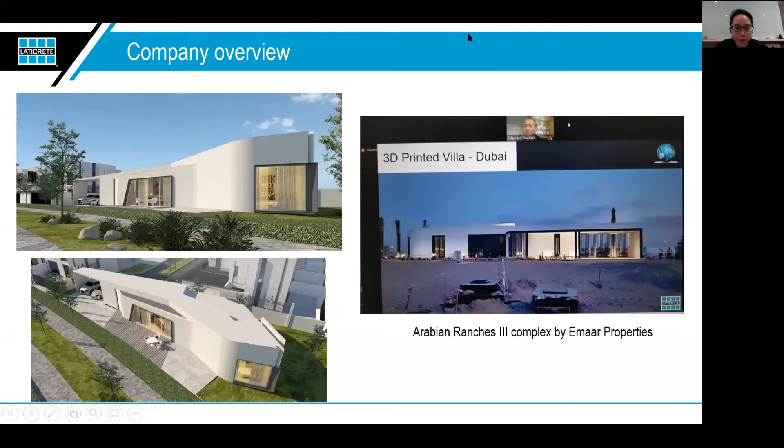So why does all of these projects look into Laticrete? It's because we provide what we call a system solution, and also the warranties that come together with the system solution. A lot of the time, what we notice is when you put it into a BQ, things are separated into packages. You have waterproofing, you have adhesive, basically everything is separated up.

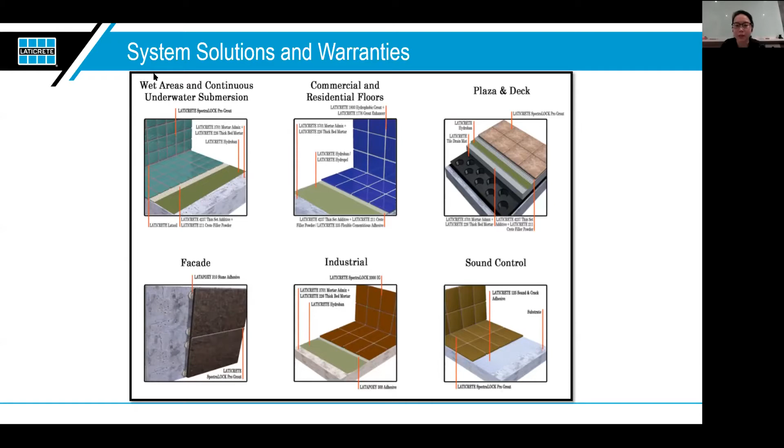So basically, system means anything from concrete up. Why? Because every time we look at things, we look at them separately—what can we get at the most cost efficient for waterproofing, then the most cost efficient for adhesive, and so on. But then after that, when you try to put them together, sometimes they may not be compatible. So for Laticrete, we like to look at it as a whole system rather than separate entities, and when you have the whole system, we will actually minimize these things from happening.

For example, you have efflorescence—these are all very common things that happen on site. When all these things happen, the next thing that occurs is who is going to bear for this. And then when you look into warranty claims, everybody will try to point fingers at everybody because they will say efflorescence is definitely not a tile issue.

So is it now a grouting issue? Is it going to be an adhesive issue? And if you have so many different brands in all the layers, then everyone will come together and say, because there are so many factors, when you want to do warranty claims, it becomes something very complicated. It may take a very long time also as they try to sort out who is going to be the one to solve this issue.

Whereas if you were to take a system approach, that means, as I say, if everything comes under one brand, then it's much easier to pinpoint who to look for when such a thing happens.

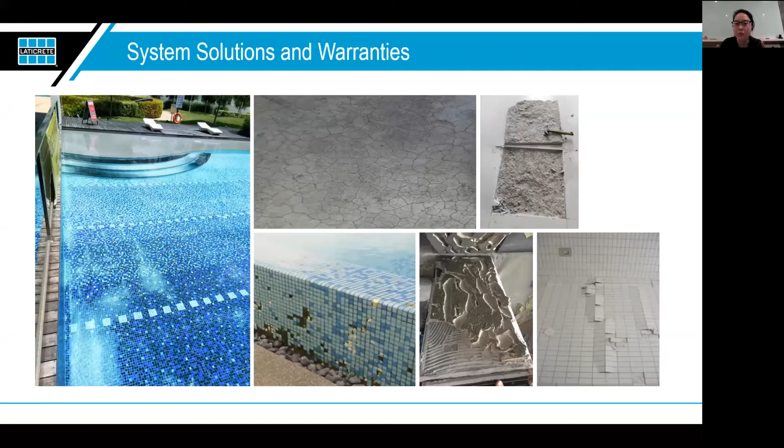So in Laticrete, other than following what the market provides—the market provides what we say is product warranty, they also provide joint warranty together with the applicators—for Laticrete, we provide one more warranty, which is what we call the system warranty, meaning anything from concrete up. If you use Laticrete, when anything like this happens, Laticrete will bear not just our product, we will also bear for the labor costs, we also will bear for the finishes costs. Of course there are some terms and conditions applying, but basically when you go for the system approach, if there's any failure, just look for us. So that's how we look at things.

So when we look at tiles and stone installation systems, why does tile fail? Why do the tiles pop up and so on? It could be a lot of reasons. It could be the tile itself—maybe they have a lot of powder underneath. It could be the adhesive failure. It could also be the screed failure. It could also be the waterproofing failure. Every single layer here, if they were to fail, it means the tile will just come off.

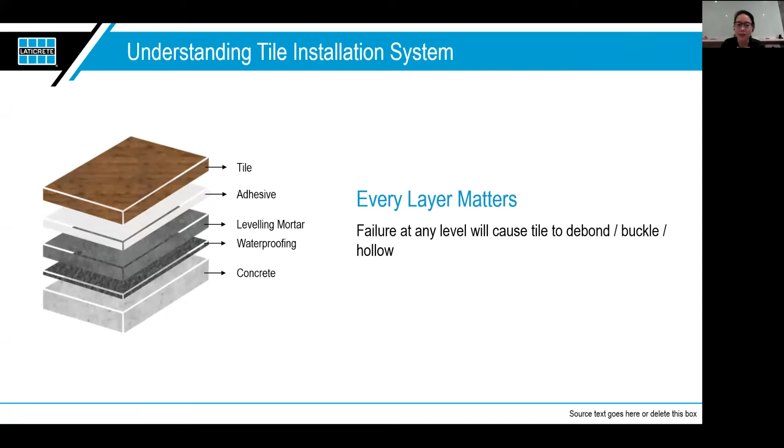So that's why we always look at it as a system, because every single layer matters. If one layer fails, not only that layer, right, everything fails. So they actually come together, they work together. Ideally, we look at it as a whole rather than individual products.

For example, sometimes when this happens, when tiles come off on site, normally what will happen is we will have technical people come on site, and they will have to see and try to determine where the failure is. Did it fail at the waterproofing layer? Did it fail at the screed layer? At which layer did it fail?

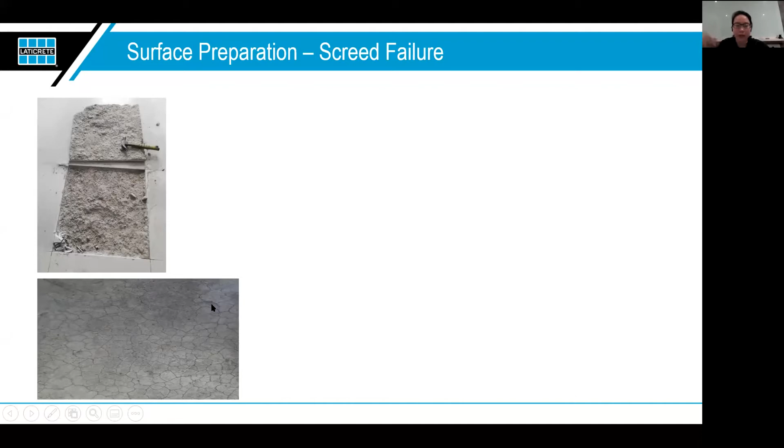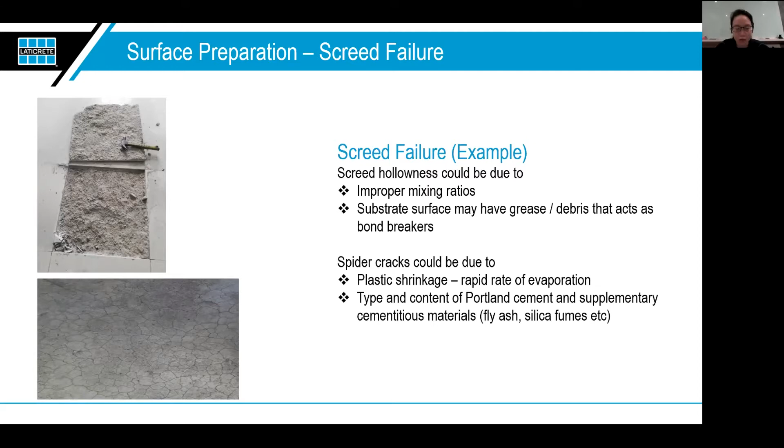In this case, it fails at the screed layer. You see the screed came off together with it. It's very common, especially in Malaysia, to see screeds happening like this, whereby you have spider cracks everywhere. A lot of time when this happens, most people will just say it's like that, screed is supposed to be like that, screed is supposed to have all these cracks, it's impossible to have crack-free screed. So because this is something we are so used to, we would think this is normal.

But you can actually reduce the cracks a lot by using the right ratio. Normally in your BQ and your specs, you do specify a very good ratio, but when it comes to site, what they practice is very much different from what is written on paper. Normally on site mix, we have less cement content because they will put one bag of cement or one part of cement to 7 parts of sand, sometimes even more than that. And it depends on how it's mixed on site.

Whereas in Singapore, they prefer a pre-pack, meaning it's already pre-packed with the ideal ratio. So all they need to do is just add water and mix it. There's no way for the ratio to run. Whereas here, it depends on the worker. Some worker's changkol is bigger, fuller, some as they hold it and hoist it up is much less. So your ratio always runs.

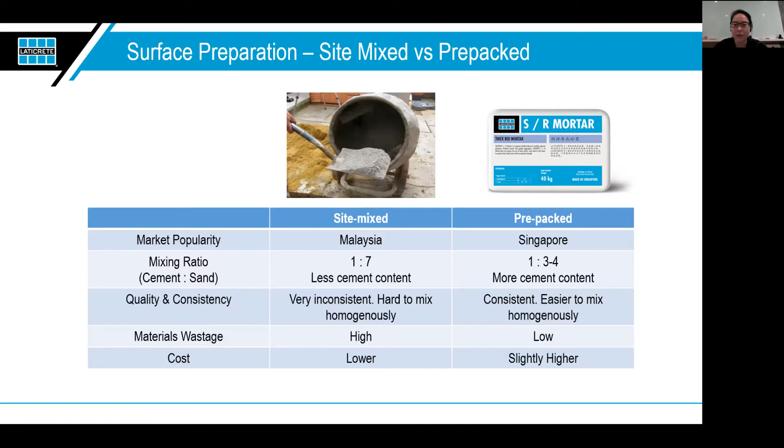So certain areas, the ratio may be a certain ratio, and some, as you move along to a certain area, the ratio is different. So what happens is once it starts to cure, the evaporation rate is very different from one place to another, because of the ratio differences. As the evaporation rate differs, the shrinkage cracks start depending on that. And sometimes, instead of using the mixer, this is very common, we use the volcano method.

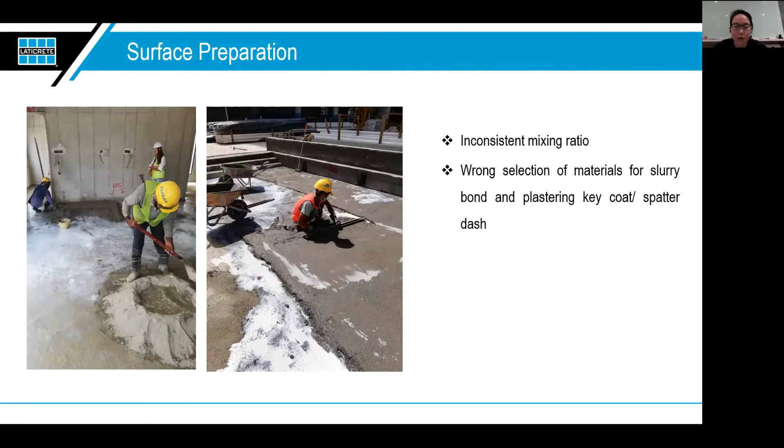The volcano method of mixing depends on how good the mixing is, but generally, most of the time, you won't get such homogeneous mixing. So all of these things contribute to why our screed in Malaysia is so commonly cracked like this. And because of that, leakages are very common as well. So all of this, you can lower from happening by using a pre-packed mortar. That's one way to look at it.

So next, we move on to waterproofing because, like I said, every single layer matters. Sometimes, like this case, the tile came off. When we look at it, everything is intact, but the waterproofing came off. So basically, we will know that it's the waterproofing layer. We go to site, we do some investigation, and when we see this, we determine which layer failed. In this case, we determine that the waterproofing failed.

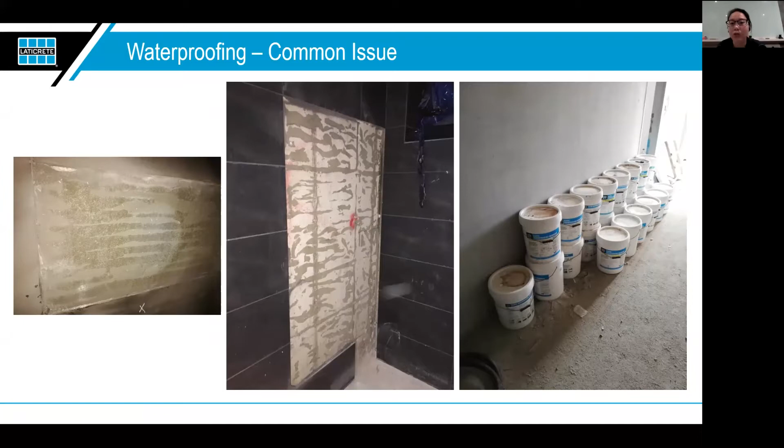So now, what causes the failure in waterproofing? There are many factors. Sometimes it could be this: when you use cementitious waterproofing, it always comes in 2 parts, 1 part liquid to 1 part powder. But we can see that on this site, we have a lot of liquid left over while the powder is finished. So you will know that the ratio has definitely run, because the liquid left over is so much, whereas the actual recommended dose is 1:1. So you know the ratio has run, and therefore the performance would have run too. That's one factor.

Another factor could be that they only use a single coat, so that what they have bought could cover a larger area, lowering the costing from there. So they end up using only a single layer. We can tell the thickness because 2 coats would be about 1 mm thick.

So from here, you can see that it's only 0.5, right? So without having those 2 coats, you also do not get the kind of performance that we already showed in our technical data sheet. So these are some of the factors.

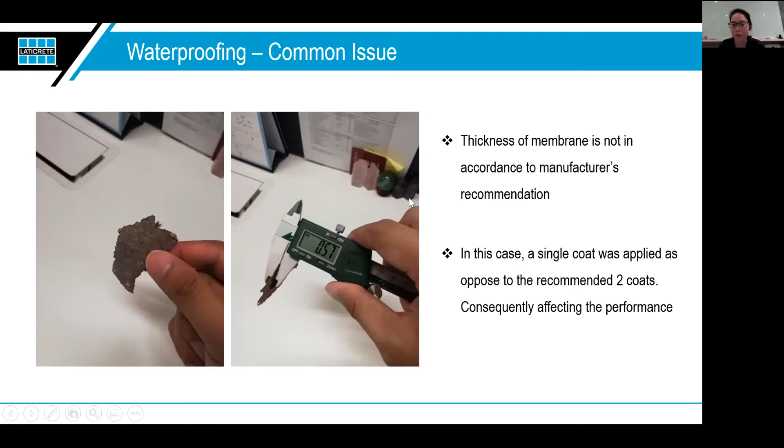One is probably the improper ratio. Second is probably they only did 1 coat, and this is very common. The third one is the sequence that we practice in Malaysia. The sequencing itself is also another issue.

So here, let's say that this is the concrete. Normally the next thing we do is we put waterproofing. Once we put waterproofing, then we put our leveling mortar. Then we put adhesive and our tiles. So this is the very common build-up in Malaysia.

But some contractors may ask you, in the shower area, is it possible that I just don't want to put the waterproofing all the way up, because when you put waterproofing, the failure chance is much higher? That's a very common question. And the failure rate becomes higher because of this: your waterproofing layer, normally cementitious, is chosen for typical toilets.

When cementitious waterproofing bonds onto concrete, for my product the bonding strength is only 0.9 Newton to concrete. Other products in the market are half of this, about 0.5 Newtons. Then after that, you put your leveling bed, which has a tensile strength of 1 to 3 Newtons, pulling much harder than this bond. So this bonds at 0.9, other brands at 0.5, and then you have a 1 to 3 Newton pull against that 0.5.

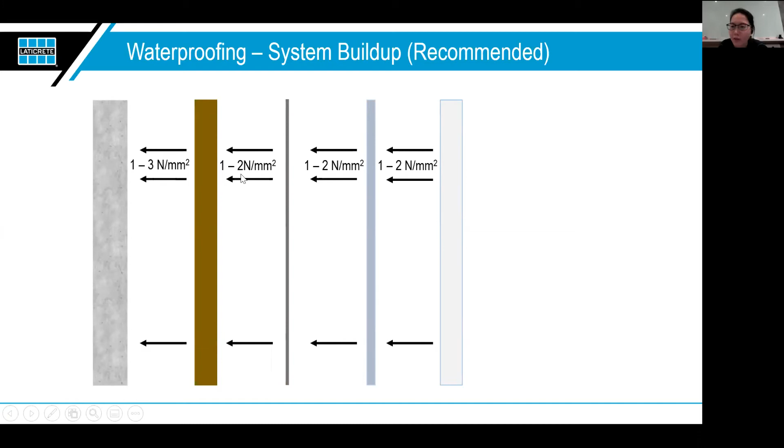With this method, you could see the waterproofing's strength has increased. Just now it was 0.9 - is it a different waterproofing? No, it's actually the same. When we did the testing, our tensile strength is 1.7, almost 2 Newtons. But that's testing onto a mortar bed. When we test onto concrete, because concrete has more oil and is more dense, the bonding is much less.

So it's basically cut by half. This is the same for other brands - if you go to every different brand and ask for their technical data sheet, it will be the same. The tensile strength will be much higher than the adhesion to concrete. That's why this sequence would be more ideal than the typical sequence we go for.

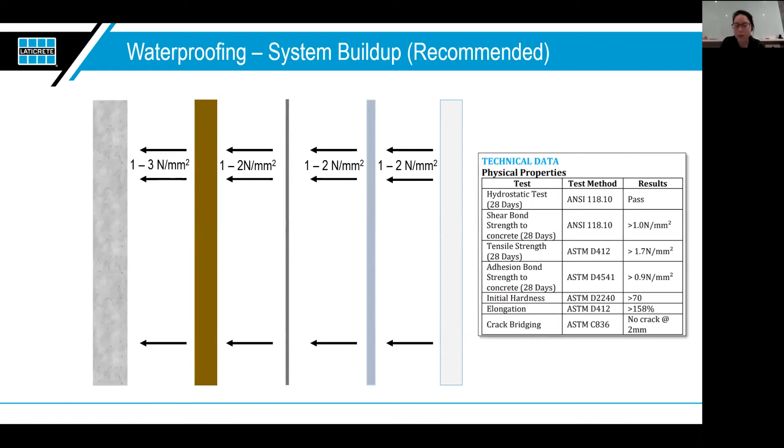It's even more imperative when you're doing it outdoors, because outdoors you're subjected to heat, constant heat, constant thermal fluctuation and so on. So it's even more stressful for the products itself. If you put the weaker bonding first, then this is what happens - they will come off.

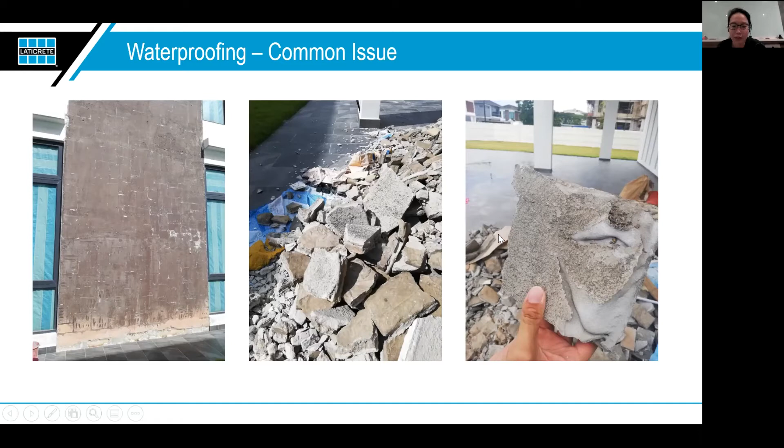Another reason we recommend waterproofing come after the leveling bed is because this is the leveling mortar - afterward it's easier for us to tuck into the piping. If we've done it the other way around, the waterproofing is down here, so there's no way to tuck into the piping.

You may have a gradient to fall towards the piping, but let's just say there are some leakages here. You will leak all the way into this area if your waterproofing is at the bottom. So it leaks all the way in and gets stuck here because there's no way for it to go.

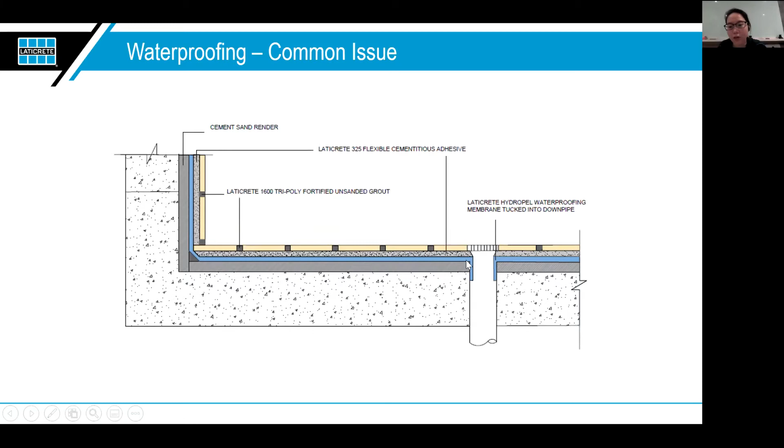But as you do this build-up, when it does leak inside, the waterproofing layer is there, so at least it goes all the way into the pipe. So this is typically what's done on site.

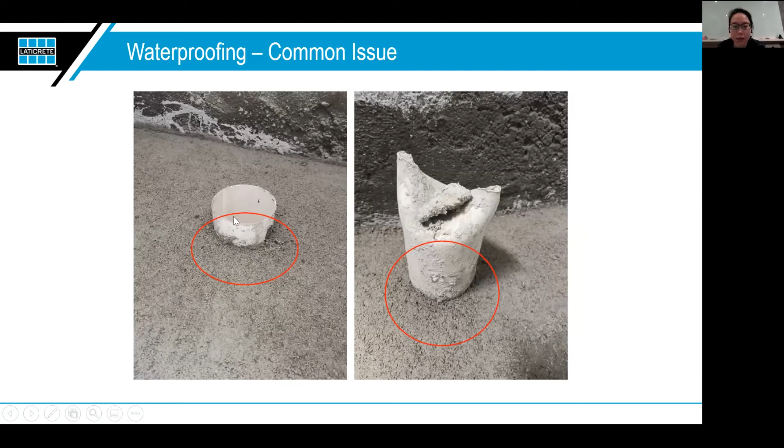You will see this is how they do it. So the waterproofing is obviously underneath already. Then they did the mortar bed, and then they have the pipe, they cut it off, right? And then they leave it as that.

So this is where over time, right, there's movement and whatnot. These differences happen as you lay it down and put your tiles on top already. Over time, it starts to shrink. So when the mortar bed starts to shrink, your tile is not shrinking. So what makes up the difference here? Who is taking the stress here at the tip?

So that's why normally when you go and check at the projects, you will see the hollowness always happen at the corners of the tiles. You tap, how come it's always at the corner one, over time? So this is why the adhesive have to be the one compensating for the stress.

So basically that's why it tests so much on the shear bond strength rather than tensile. Not so much on tensile, a lot on shear bond. Why? Because this difference here, your tile adhesive can only absorb, it cannot absorb a 2 Newton per square millimeter sort of difference for a very long time. Eventually it will disintegrate. When it disintegrates, it will disintegrate until the area whereby is only 0.5 Newton shear stress, then it will stay.

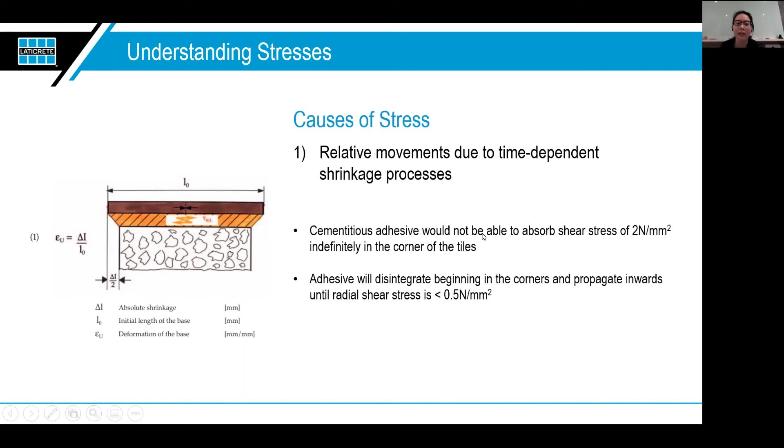So normally when you remove a tile, you see there's one circular area normally at the center only. The corner is empty. How come? It's because it disintegrated, the stress is too high.

So if you use just normal adhesive, let's say if your tiles are quite big or an area whereby there's a lot of movement, you see that the edges, as you go further away from the center, meaning the larger your tile, the stress increases a lot because the shrinkage is happening. So the adhesive has to compensate for it, and therefore you will see there's very high stress here. It's okay for the first year maybe, but for the second year, you start seeing suddenly so many hollows happening because it has disintegrated.

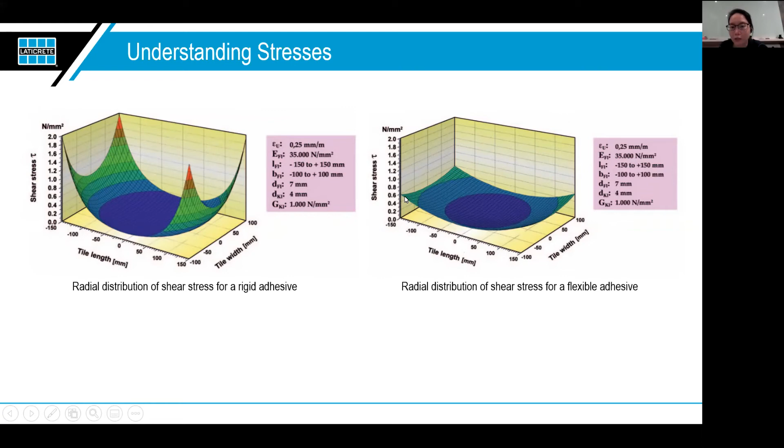So that's where S1, S2 flexible adhesive is so important, or at least those adhesives that comply to a certain level of shear bond strength is so important, because here basically it's the same size of tile, but you see the stress lowered by a lot because the adhesive is flexible. Why is the adhesive flexible?

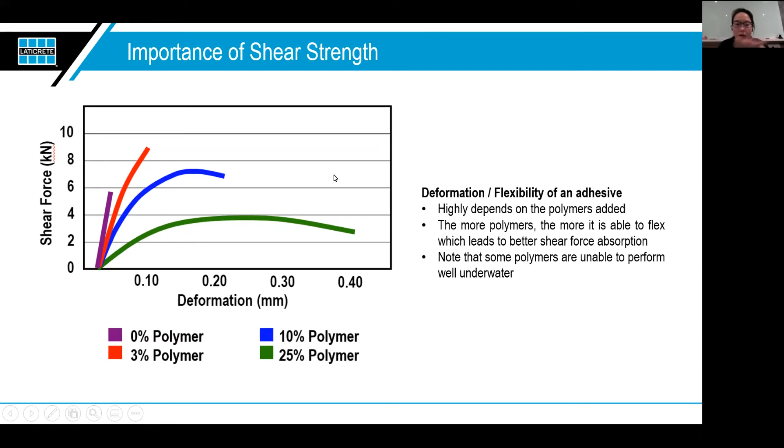Because we add in polymers, we add in chemicals in. So of course, the more chemical we put in, the better the performance. But you have to always check with the supplier itself, because some adhesive on paper looks like it's very high strength because of a lot of polymer, but the polymer may be sensitive to water. So please don't put it into the swimming pool and so on. So always refer back to the supplier, because sometimes it may look good on paper, but it may not be so good when you put it under certain conditions.

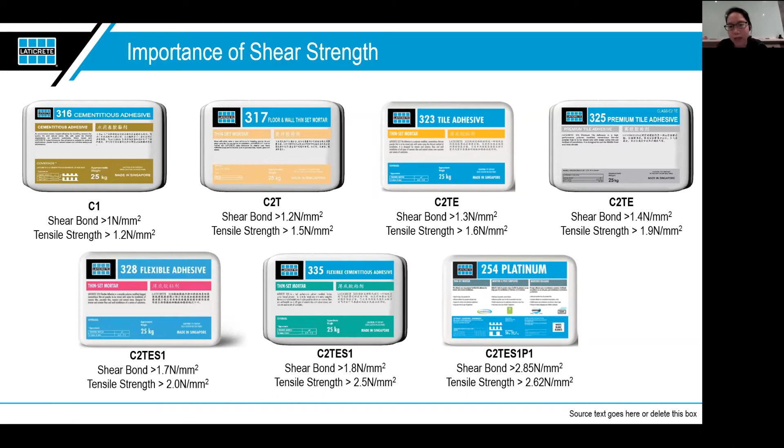And you will see, what's the point of putting it in? You will still fail in the end. So the best way is to actually put the product name and put 'or equivalent.' That would be the best, because the product itself will already show you what is the criteria that this product has, so that if they want to change, they have to match back the equivalent product. So that is the best way that I can think of that you can ensure a certain performance is met.

Last but not least, two components doesn't mean it's better than one. A lot of time there's a misconception that two components always is better than one, but times have changed. Last time that may be true, but now our single component is much, much better than our two components. But there are situations whereby we may want to use the two components.

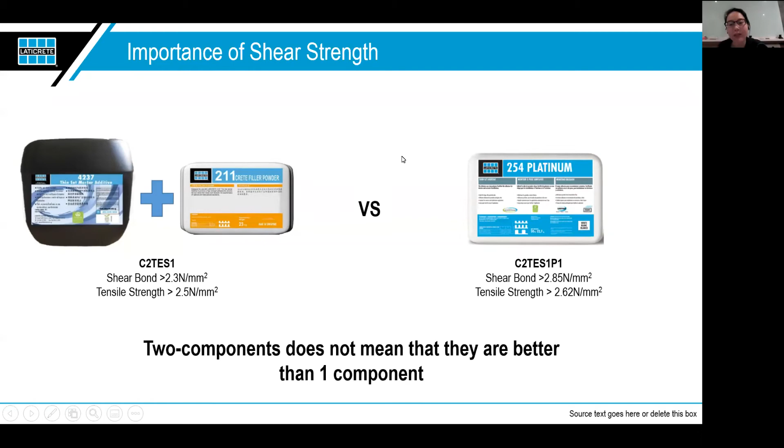For example, if you're dealing with certain things that are very sensitive to water, then we may want to use two components, because two components, this is latex, so there's no water at all. Whereas this one, you need water. So it depends. Certain times we may use two components, certain times we may use one.

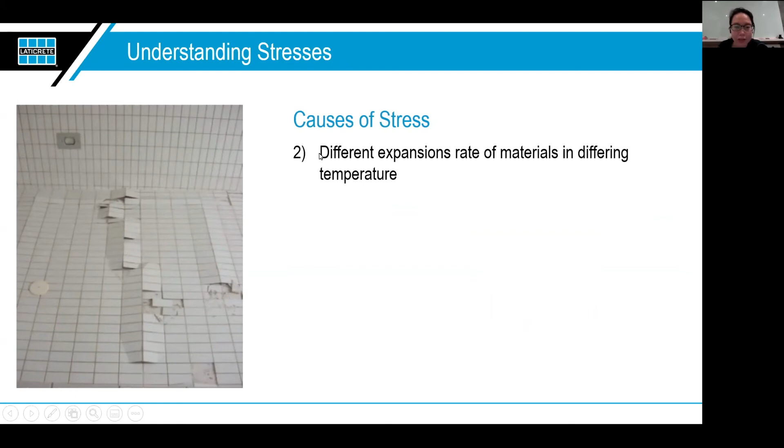Now the next stress is expansion. That's why expansion joints are so important. If not, you will have all these things happening. I know expansion joints may look a bit ugly, we try not to put so much if we can, but it's very important to have expansion joints and movement gaps as well. Ideally, we will always say 3mm will be the most ideal.

I know there are certain requirements that say we want it at 2mm, we want it at 1.5mm - it can be done. It's just that you have to ensure there's enough perimeter gaps and sufficient expansion joints. If not, you will have this thing happening - buckling in the middle.

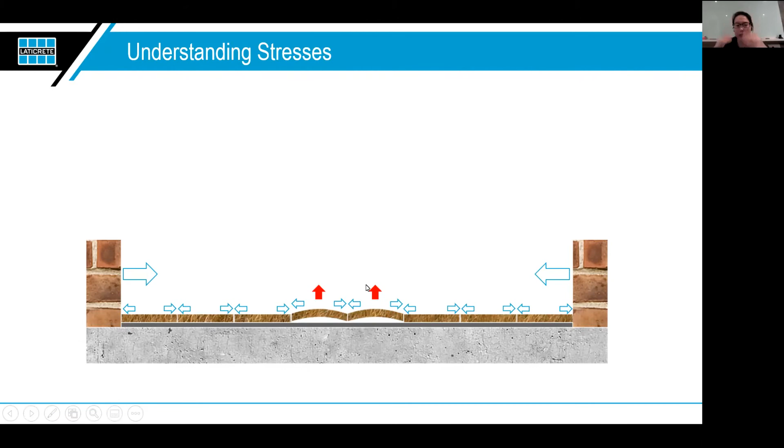And this one is very dangerous, because when it suddenly buckles, it's like an explosion - it suddenly goes boom, like that. It doesn't subtly come off, it just happens. So very, very dangerous, this type.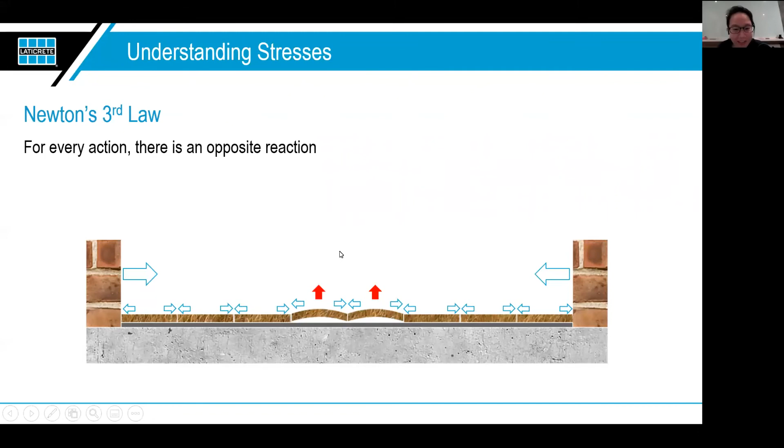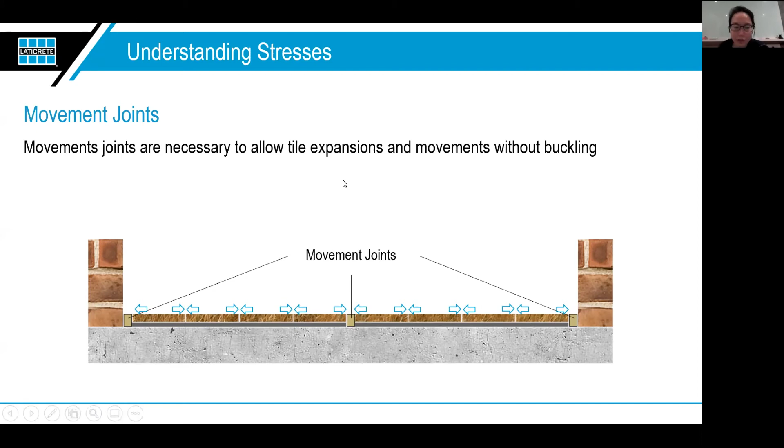So movement joints are very important. Always remember expansion joints, movement joints - over how many meters and so on. Normally internally, we're talking column to column, or at least every less than 10 meters. If you're looking at externally, you're looking at every less than 3 meters, or every 3 meters you might want to have one. So perimeter joints, very important.

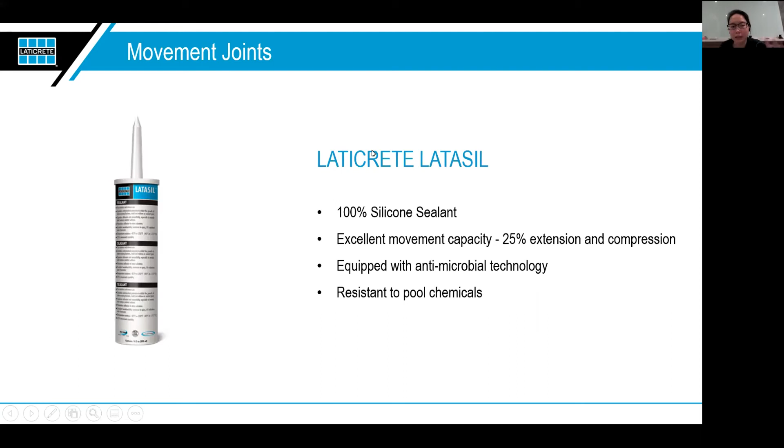Expansion joints, important. You can always fill it with silicone, or you can also fill it with the expansion joint itself. But in Laticrete, we provide the silicone - we don't provide the metal expansion joints. So these are some of the areas that you can use.

I would tell you this issue is actually none of that problem. The issue is this: a lot of time when they lay the tiles, one day later they grout. After they grout, they cover it with a canvas sheet. So remember, everything is wet underneath - the adhesive is not fully cured yet, your grout is also not fully cured yet.

Your grouting, you just apply the grout only. So what happens is, when you straight away put the canvas sheet on top, the air, the vapor has nowhere to go, there's no escape. So nowhere to go, they will find any weak point that's possible for them to go into. Tiles, they are very strong - normally it's tested almost impervious when it's tested from the top.

It's never tested from the sides. So that is the weak area of the tiles itself. That's why when the air is trapped with nowhere to go, you will see it on the sides, and therefore you have all these etching marks. It goes underneath the tiles, so this one you cannot clean. Unfortunately, to resolve this, you have to remove the whole tiles and lay it back again.

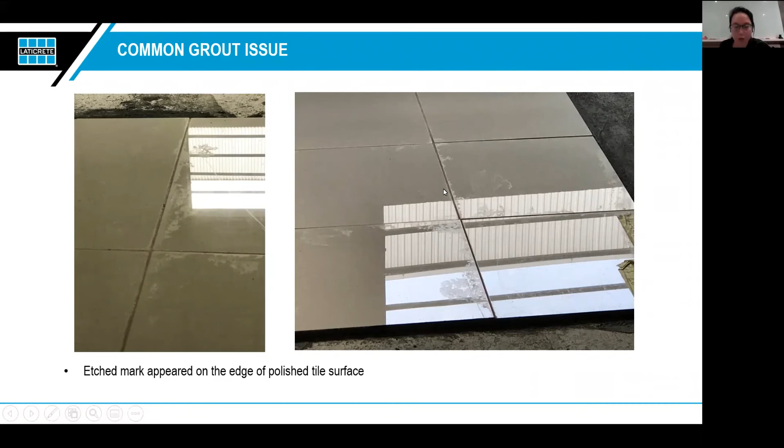So a lot of water vapor causes the etching at the sides. To avoid this from happening, we would highly recommend that before putting the sheet, you at least let it cure for 3 days.

Let the air, vapor and whatnot disperse first for at least 3 days, then only you cover it with the canvas. So of course, if they are rushing for jobs and other trades want to come in to put wires and so on, ideally you don't put the grouting first. That means after tiling, you put the sheet already, then once you're done with every other trade, you come back and do the grouting. So that's one way to minimize this.

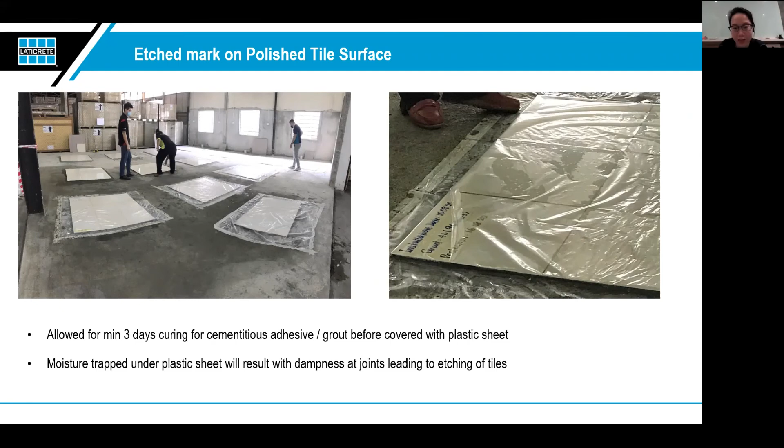But if you find all of that very hard to comply with, the next best thing is to, instead of using cementitious grout, consider using either a PU grout or an epoxy grout. With this type of grout, you will definitely not have this problem.

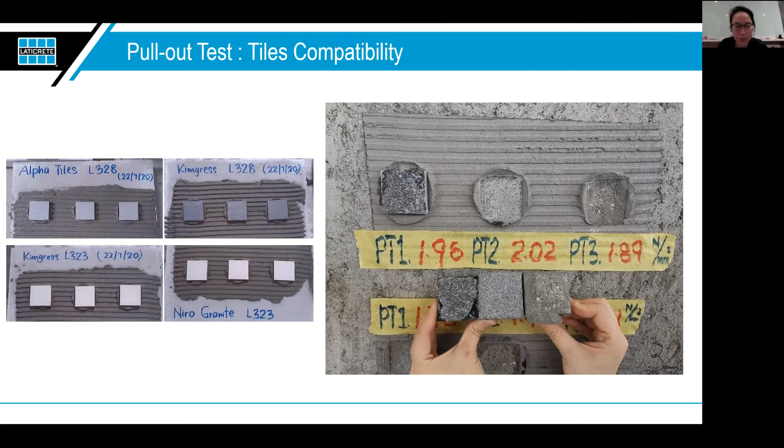So these are some of the services that we have. Of course, products is one part of it, but at Laticrete, we don't just emphasize on our product, we emphasize a lot on our after-sales service. We are a very technical-based company, so we emphasize a lot on after-sales.

We have a technical team that goes to site. I know many other companies will tell you they do the same, but the frequency is different. Our team basically goes to site almost every week, sometimes twice a week, depending on the project and how crucial a certain area is. Sometimes they go 2 to 3 times if it's too crucial.

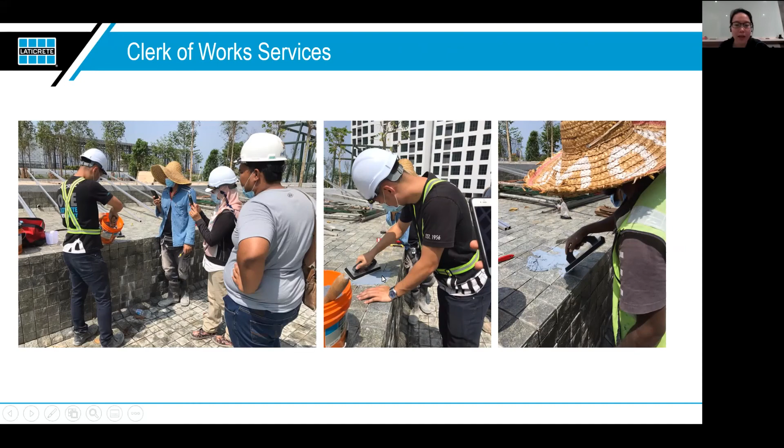This is something in Malaysia we're the only one supplying at the moment. So very easy, no way you can go wrong with this grout. Just open the lid and you can use it straight away, no mixing required. And the performance is fantastic.

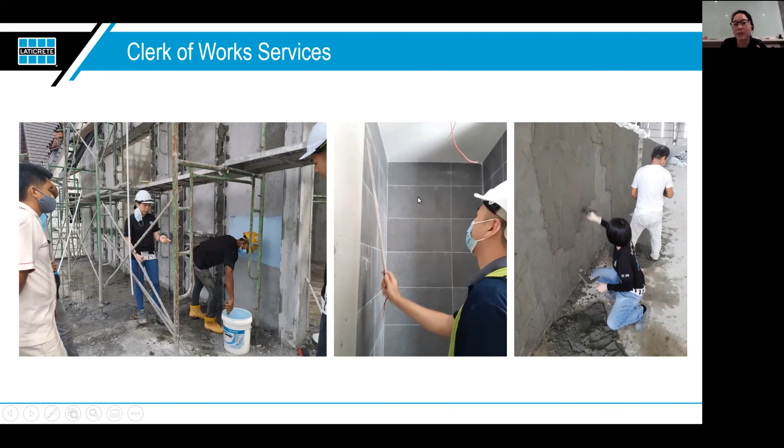Okay, so of course they will also help you check for the hollowness and so on, and guide the workers on how to use the product. So basically all of this is to minimize problems from happening, because these are some of the things we caught on site.

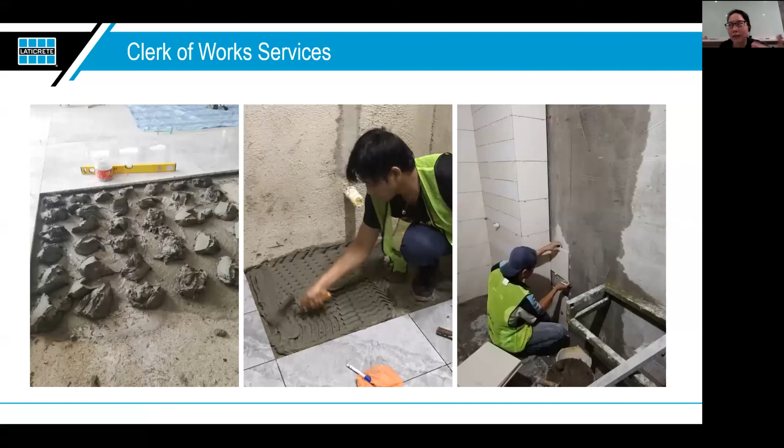So all of these things, we try to capture as and when they happened, and we try at least to let the contractor know about it, so we can try to minimize this from future problems happening. So that's all for our sharing.